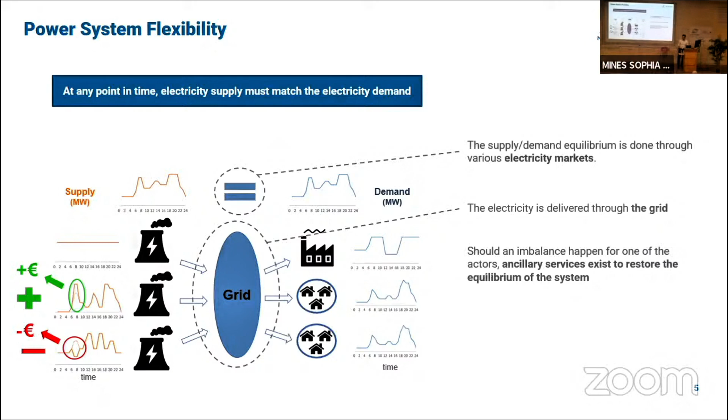But we can ask ourselves: what happens when we increase the share of renewable energy? By doing so, we increase the amount of imbalance occurrences and reduce the amount of conventional generation available for balancing services. To palliate that issue, one possibility is to shift part of the balancing responsibility toward the demand side. Here you have the example of an industrial actor providing reserve and an aggregation of residential actors doing the same.

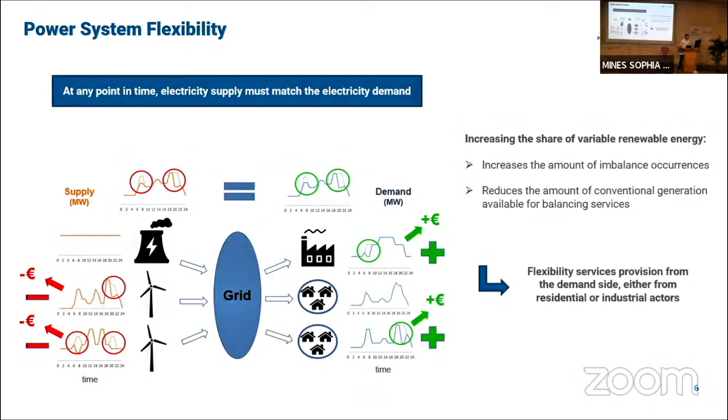In this thesis, we will focus on the industrial part of this. From an industrial actor's point of view, we can define industrial flexibility as the modification of electric usage to reduce its costs, while helping the grid, without negatively impacting its overall process.

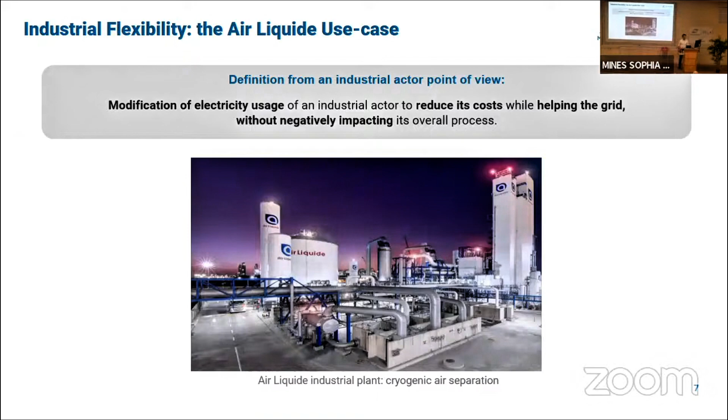Here you have an example of an industrial process at Air Liquide called cryogenic air separation, which produces industrial gases for a various range of clients, for example, oxygen in hospitals. If we replace this by a more schematic view of the process, we can identify Air Liquide's main goals when it comes to industrial flexibility.

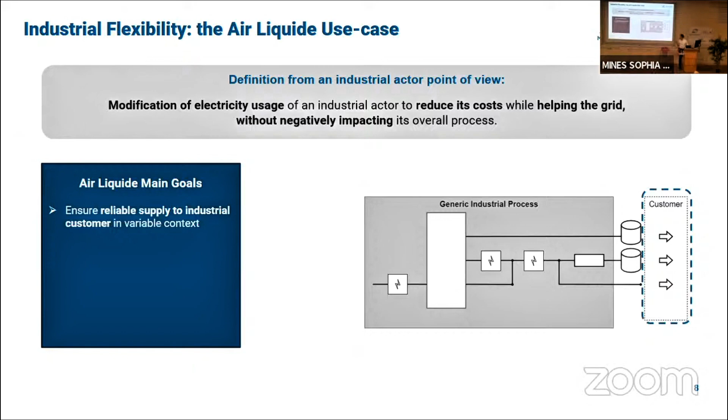First, to ensure reliable supply to industrial consumers in a variable context. Second, to decarbonize the processes through direct renewable power consumption. And finally, to reduce costs through optimal electricity purchase and the provision of ancillary services.

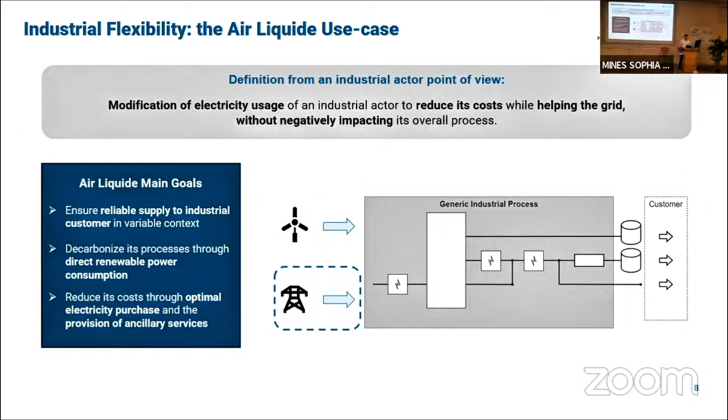We can link these main goals to identified challenges when it comes to the operation of our processes. First, there is difficulty to identify and quantify the flexibility potential of complex industrial processes. There is also uncertainty regarding the ability to power industrial assets with variable renewable sources. And when trying to optimally purchase electricity, there is financial exposure related to electricity markets.

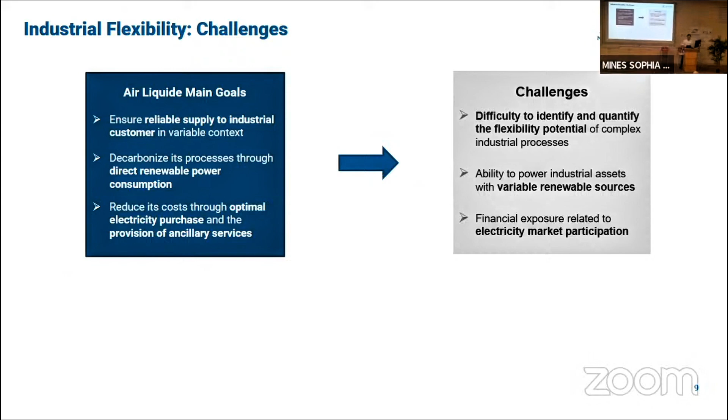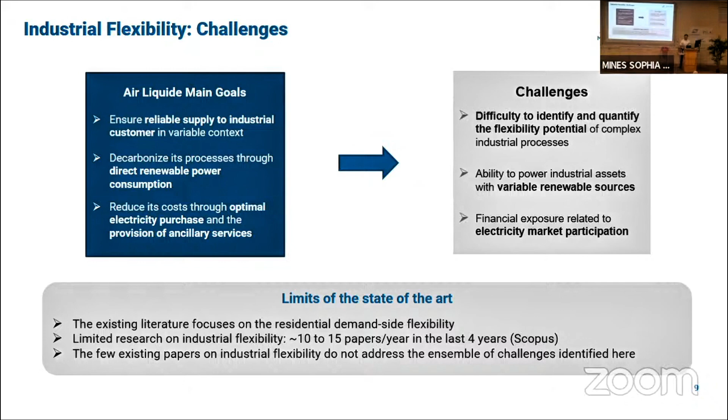When we look at the state of the art, we observe that the existing literature mainly focuses on residential demand-side flexibility, which is smaller and needs to be aggregated. There is limited research on industrial flexibility, approximately 10 to 15 papers a year in the last 4 years, and before that, not so much. The few existing papers on industrial flexibility do not address the ensemble of challenges identified here, especially the difficulty to identify the flexibility potential when considering complex processes, and the realistic modeling of market participation.

To answer these challenges, we have formulated 3 main objectives. The first is regarding the complexity of the process and the flexibility potential identification: we want to develop a methodology to identify and quantify the flexibility potential of an industrial consumer. The second is related to market participation and the uncertainty related to it: we want to formulate a decision-making strategy to valorize the flexibility of a plant in multiple markets. The third is a combination of the two, when we have relatively inflexible assets for which we want to valorize the flexibility. We want to investigate investments in new flexibility levers.

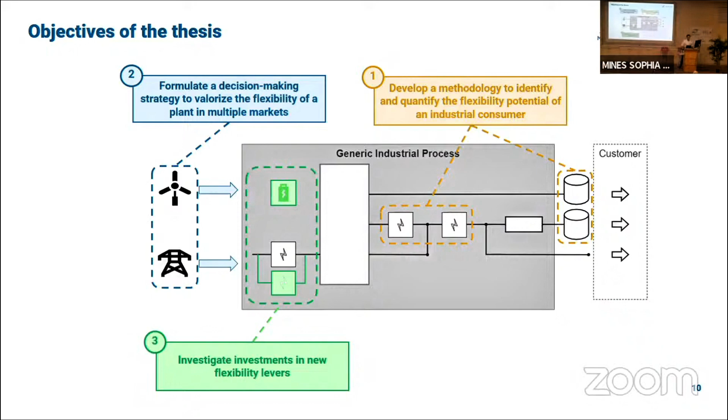Now, on to our first objective, which is flexibility potential quantification. The problem we identify is that in complex processes, knowing the flexibility potential of each individual power component is not enough to characterize the flexibility potential of the whole process.

Looking at the literature, when it comes to industrial flexibility quantification for industrial processes, the identification of the flexibility potential focuses on the limits of the feasible space of operation, but does not consider the possibility to move within this feasible space. Looking at power systems, on the other side, the identification of the flexibility potential this time considers the possibility to willingly move within this feasible space. However, the representation of industrial assets within this analysis is too simple.

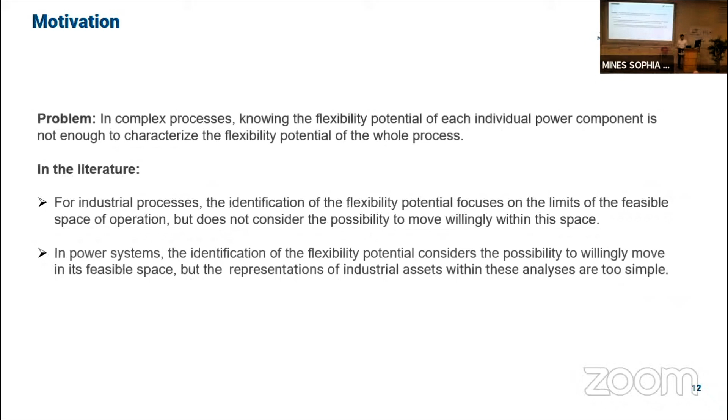So to answer this with a methodology to identify and quantify, we have 3 main methodological steps. The first is that we want to describe the feasible space of operation of a complex industrial process. The second is that we want to quantify the ability to move within this feasible space. And finally, we want to identify the usual operating points of the plant when following a demand profile.

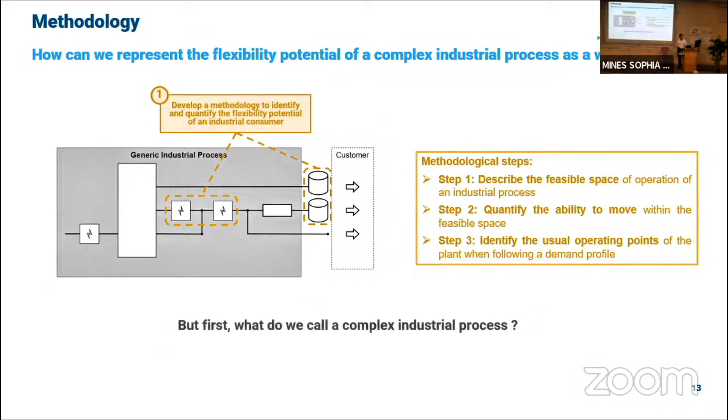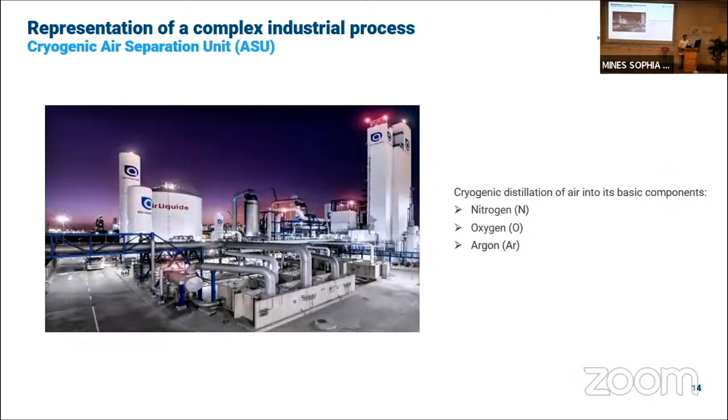But first, we can ask ourselves, what do we call a complex industrial process? Here is the picture from before. We are still looking at the cryogenic air separation unit, which will produce gas that requires a certain chemical equilibrium within the process. This cryogenic distillation of air will turn air into its basic components: nitrogen, oxygen, and sometimes argon. If we look at a more schematic version of this process, we have at the center the distillation process itself, with different pressured columns at different temperatures where the distillation takes place.

Looking at the flexibility aspect of these plants, we have our flexibility levers, which are power consuming components in the shape of compressors before and after the distillation columns, and liquefiers. And we have as well liquid product storage.

For this plant, we have product demand and clients. This product demand can take 2 shapes: it can be gaseous for oxygen and nitrogen, and it can be liquid for oxygen, nitrogen, and sometimes in specific cases, argon.

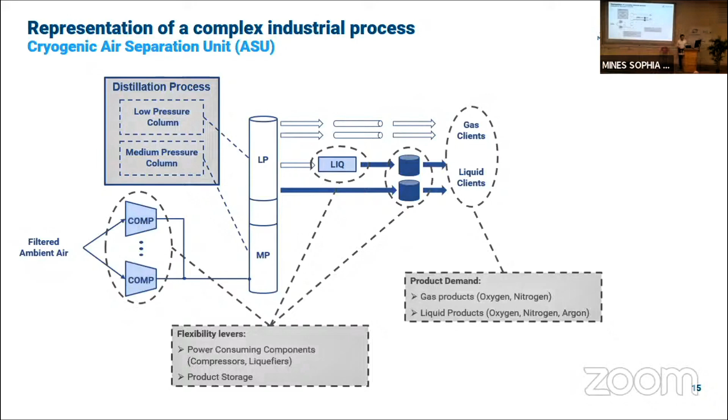The complexity sources for this kind of process are the chemical equilibrium within the distillation process that has to be preserved in the columns, and the product output interdependency. Meaning that we cannot just change the power consumption of our compressors and other power consuming components; we also have to account for the distillation process itself.

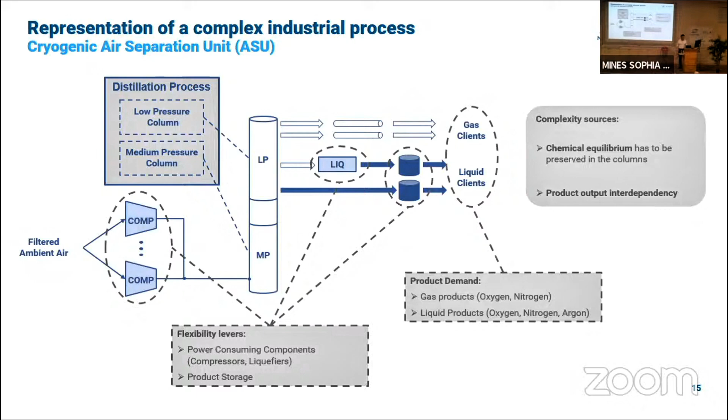Now, if we look at the modeling of such an asset, here we have the representation of a mixed integer linear problem that we use to optimally schedule such a plant. We use an objective function where we minimize electricity costs, subject to a certain set of constraints that will describe the physical behavior of such a plant.

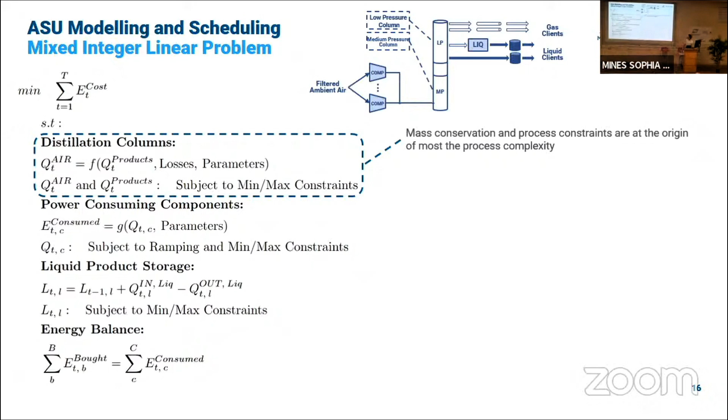So we have here the equations, or a summary of the equations, representing the distillation columns. Within it, we have mass conservation and process constraints, which are the origin of most of the process complexity. Then we have our constraints for power consuming components. Here I put an example of an equation for the compressor: in this case, they have a nominal power, ramping, and the minimum and maximum flow Q within the compressor. We also then have liquid product storage constraints and the energy balance.

Here is the tricky part: the mass conservation constraint will affect the process flexibility, therefore making the flexibility quantification non-trivial.

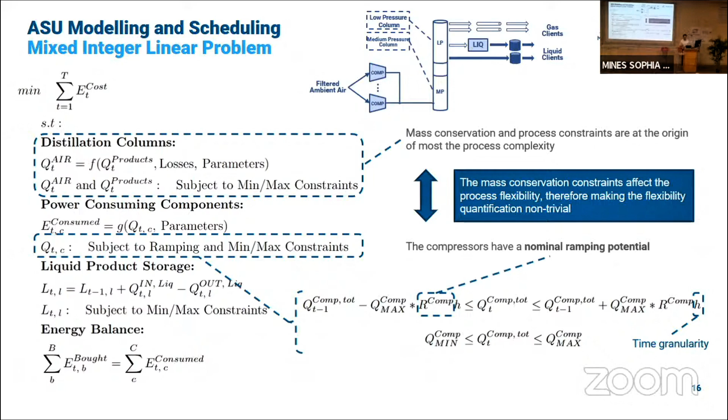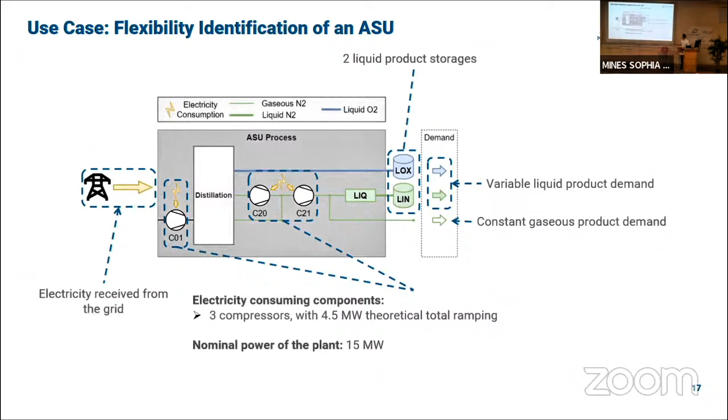Now, looking at our use case, we consider a very specific case: a small air separation unit that will receive electricity from the grid, have two liquid product outputs, liquid oxygen and liquid nitrogen, with variable liquid product demand. And we have one gaseous output with constant gaseous product demand for the gaseous nitrogen. We have our flexibility levers, which are electricity consuming components: three compressors with a total of 4.5 megawatt theoretical total ramping, and a nominal power plant. The nominal power for the plant is 15 megawatt, which is the sum of the compressors.

Now going back to our methodology. Our first step of the methodology was to represent the feasible space of operation.

To do that, we want to create a grid of operating points using the min-max output for both products. We will run a one-time step optimization in which we will fix the output values of the plant and check for feasibility. If it's feasible, we put it in the grid. If it's not feasible, then it doesn't appear in the grid.

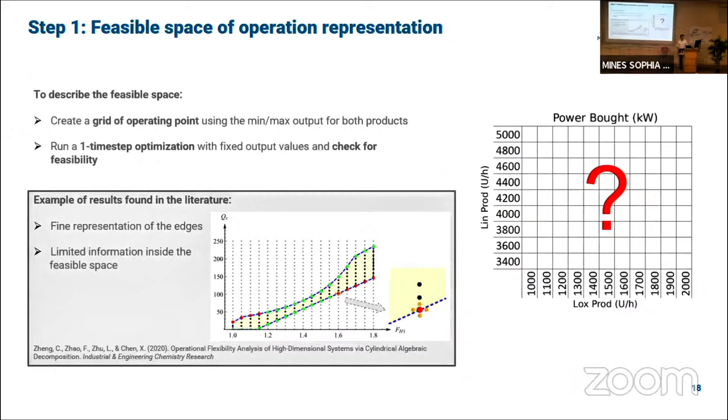Here you have an example of the result found in the literature, where the authors do a fine representation of the edges of the feasible space, but we have limited information regarding what's happening inside the feasible space.

Here is our first result for step one. We represent the feasible space, as we can see here on the right, with the white square being where we cannot go. And the optimal power bought by the plant for every operating point on the grid. We observe that the minimum and maximum outputs of the plant cannot be obtained for both products at the same time.

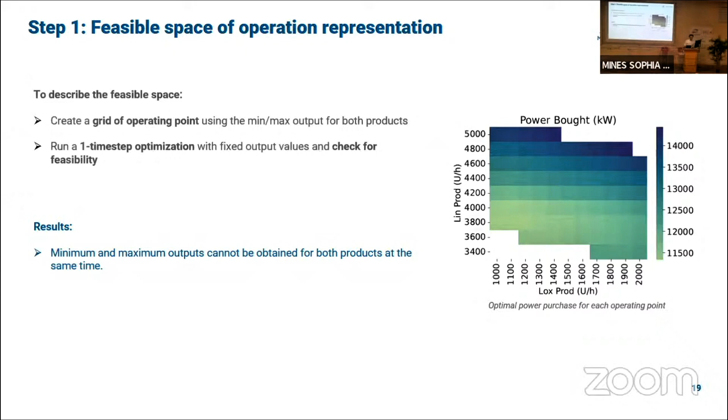From that, we go to step two, which is how do we find the ability to move within the feasible space of operation? To do that, we want to observe power ramping, which is the ability to change power from a given point. So to do that, we run a two-time step optimization this time to move from one given operating point within the feasible space to another within the feasible space, and we check for feasibility.

If it's feasible, we check the power difference between the 2 points. We keep the move with the maximum power difference in each direction, and for each operating point, we have our maximum power ramping. We observe that it varies within the feasible space.

Especially interesting, we have a limited upward ramping here when it comes to the lower value of liquid nitrogen production, which is a representation of the limits due to product output interdependency. Overall, we also identify a unilateral power ramping of up to 2 megawatts and never in both directions at the same time.

So on the left, we have the downward ramp where we consume more electricity. We have higher possibility to go down in power, and the upward ramp, which is the opposite.

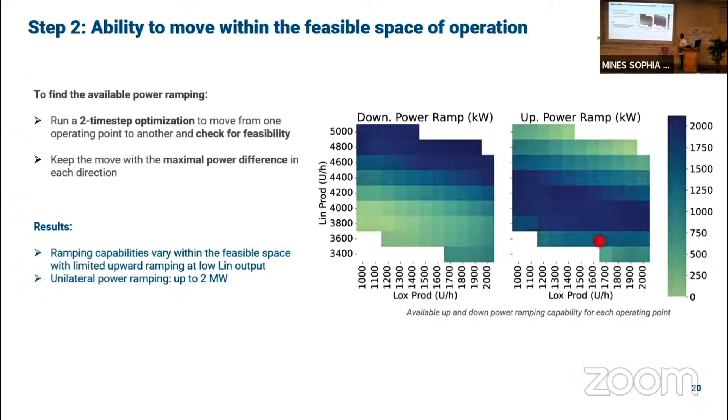From this, we want to identify which operating points appear or are used resulting from the scheduling optimization of the plants when we consider variable demand of the product. To do that, we run a weekly optimization to account for the product demand profile, and we extract the operating points from the results and their frequency of appearance.

We obtain these results. Here on the plot, you see grayed out the unused operating points, and colored, you see the operating points that are used when optimally scheduling the plant with the frequency of appearance. Here in the table, you see the ramp available in terms of frequency occurrence.

What we can see is that the operating points used are located at the extremities of the liquid oxygen output range, and that the liquid nitrogen on the y-axis product output is used to vary the power consumption of the plant. The 2 megawatt of ramp that we previously identified,

only appear between 35 and 41% of the time, and never in a symmetrical fashion. Meaning that we cannot provide for one operating point 2 megawatt up and down at the same time.

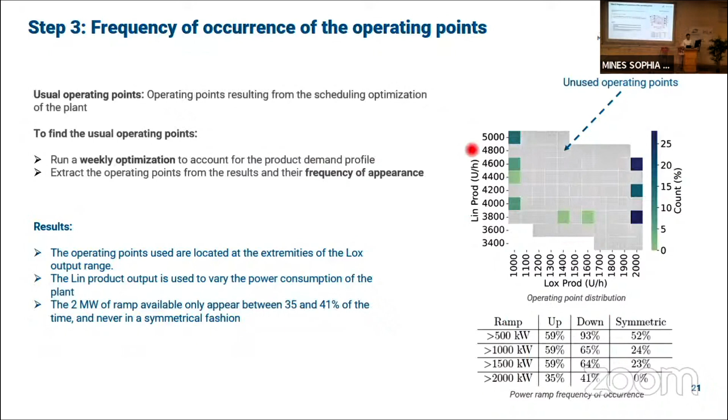Now, to summarize the results for this first approach, we have identified and quantified the theoretical flexibility potential of an industrial plant, mainly starting from a theoretical flexibility potential of 4.5 megawatt from the individual electricity components. The methodology only identifies up to 2 megawatts of flexibility within the process due to the process complexity.

Analyzing the practical flexibility potential available for ancillary services provision when considering demand profiles. Under usual operations, only a handful of possible operating points are used.

The most efficient points are found on the extremes of the feasible space, which limits the available power ramp of the plant. Overall, this methodology provides a graphical information about the flexible potential of the process as a whole, instead of only considering the theoretical characteristic of each individual component.

This work was presented in the PSCC conference in 2021 and then published in the Electric Power Systems Research Journal.

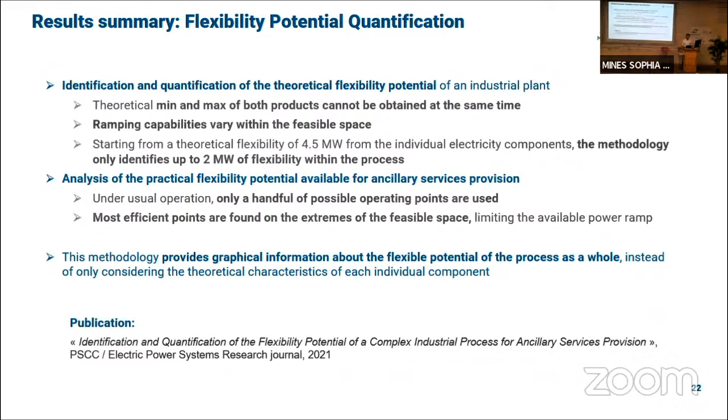Now on to our second objective for this thesis, which is the uncertainty-aware multi-market scheduling. Looking at multi-market participation for industrial assets, we observe that the literature lacks realistic simulations. Participation to market rules are not considered. For instance, gate closure are not considered.

Prices are assumed to be known in advance. The granularity of the bids is not considered. And this all can have a large impact on the financial result of the plant.

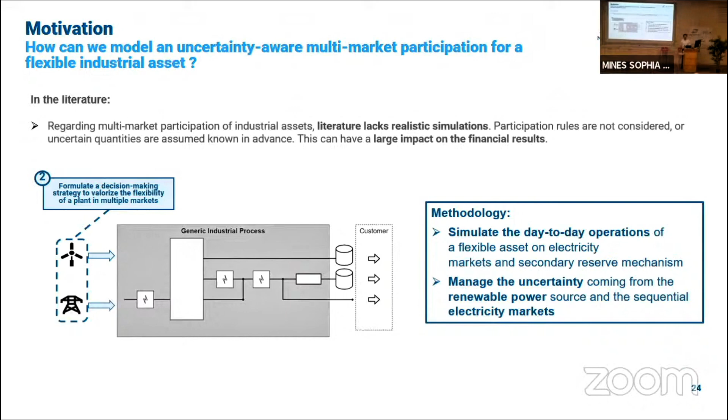To analyze that, we have a methodology with two points. First, we want to simulate the day-to-day operation of a flexible asset on electricity markets and secondary reserve mechanism. And we want to manage the uncertainty coming from the renewable power and the sequential electricity markets.

Looking at the electricity purchase and reserve provision side. Electricity markets span different time scales, which allow us to hedge the uncertainty related to these markets.

When we look at direct renewable power consumption, we cannot buy it on the short-term markets because they do not allow for the identification of the source of the electricity that we receive. To have certainty and certify that the electricity we receive is renewable, we go through a PPA contract, a long-term contract called power purchase agreement, which allows for the direct purchase of renewable power for a certain price that is set while contracting, but we will go back to that a bit later.

Then we have the reserve aspect and the balancing aspect of the markets in green, where the market operator receives bids to balance the grid through several markets. The volumes offered by industrial actors are of high interest to the grid operators because of their large power and energy density compared to residential flexibility, for instance.

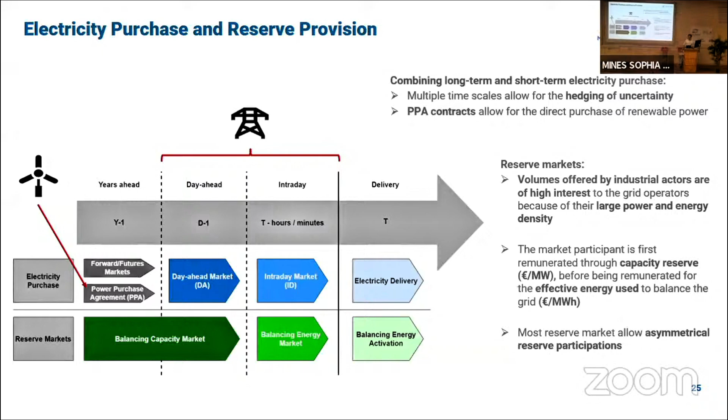The market participant is first remunerated through capacity reserve in a day-ahead fashion, before being remunerated for the effective energy used when considering the effective need of balancing the system, this time with intraday bidding. Most reserve markets allow asymmetrical reserve participation, which is good for us, as we identified previously that we could not provide as much reserve as we wanted in a symmetrical fashion.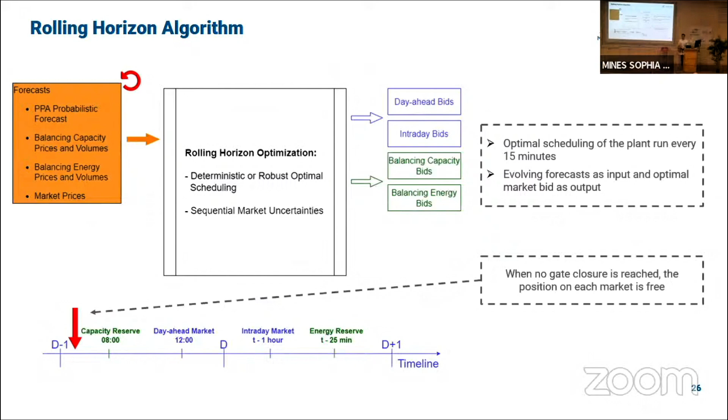Below we have the time scale of the markets. When no gate closure is reached, the position on each market is free and the optimization problem can feel free to optimally dispatch the power bid.

When the rolling horizon reaches gate closure, the last optimal position returned by the optimization problem is used to compute the market clearing. So we decide by the status of the markets if we are scheduled, if we are accepted, at what price, at what volume. And then the market clearing results are used as input, this time on the left, for the optimization. We go through that throughout the day and throughout the year.

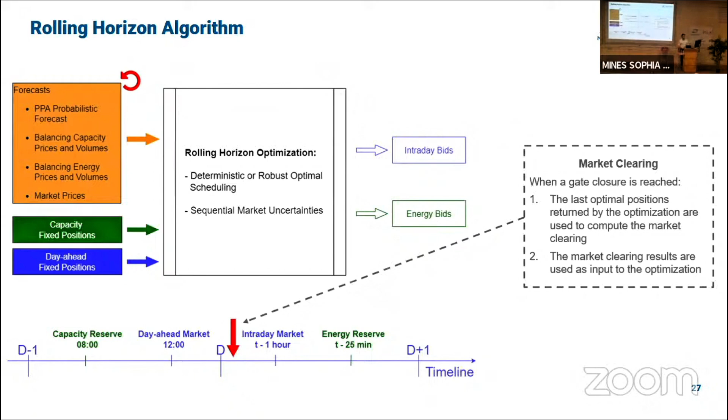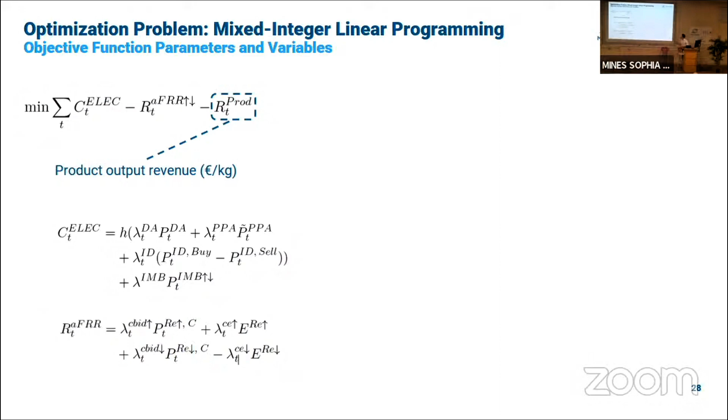Now looking at the optimal scheduling itself, we represent it using an optimization problem, which is a mixed integer linear programming problem once again. Here we present the objective function and the parameters. The main objective is to minimize electricity costs and maximize reserve revenues and product output revenue.

For the electricity costs, we will have the power bought on the different markets considered as a variable, multiplied by the price of the market, which is an uncertain parameter. The energy received through the PPA for renewable power is considered an uncertain parameter because we assume we have to consume anything sent by the wind power plant.

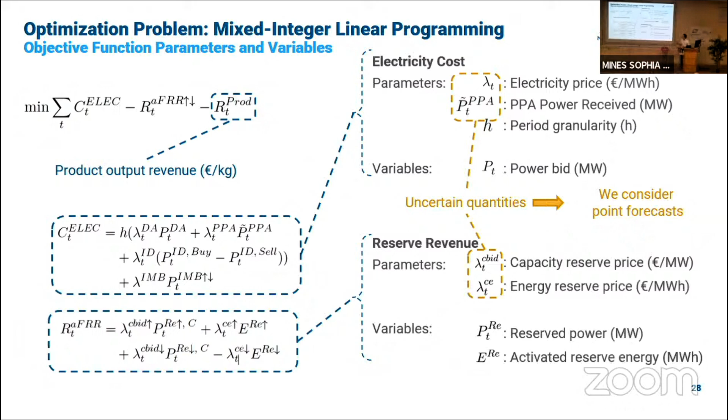When it comes to reserve revenue, the work is a bit similar. We will multiply the power reserved by the capacity reserve bids. So the power reserve is a variable and the capacity reserve bid is also an uncertain quantity, an uncertain parameter. The same is done for the energy activated through the reserve. For our uncertain quantities, we consider point forecasts.

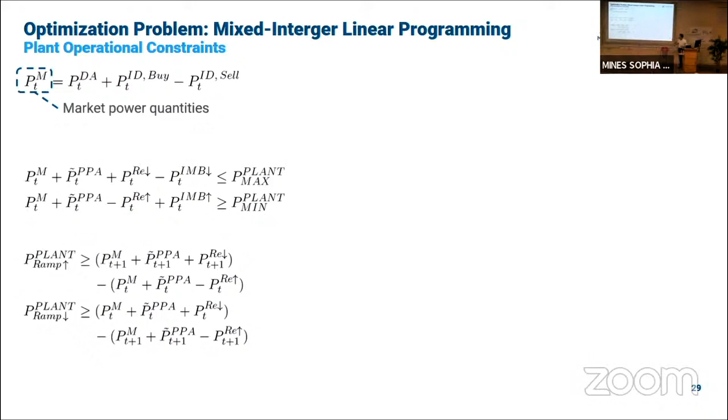Looking at the plant operational constraints, we have here expressed the power market quantities, day ahead and intraday, as PM. We have two types of constraints presented here: first, the minimum and maximum power consumption of the plant, and the minimum and maximum up and down ramp authorized by the plant.

Because we do not know the amount of energy effectively activated for the reserve, as it depends on the current status of the market and grid balance, we cannot use the reserve provision to keep the power balance of the plant. This means that for the min and max power, only the reserve direction that will adversely affect the min-max constraint is considered. For instance, this one will only threaten to violate the constraint, whereas this one would help the system keep in balance.

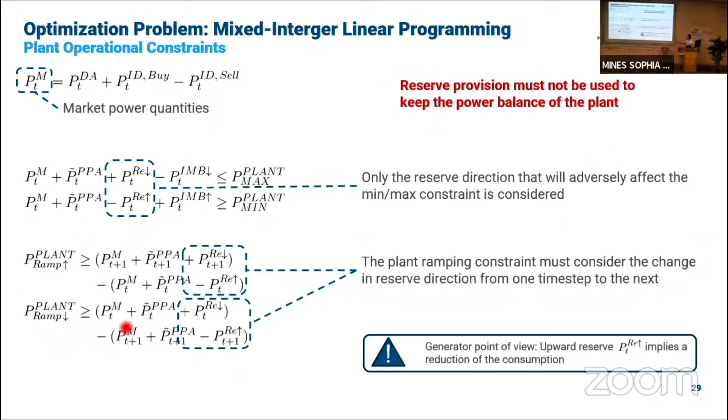The same logic is applied to the power ramping. The plant power ramping constraint must consider the change in reserve direction from one time step to the next, and only in the direction that will adversely affect the constraint. We have to note that we are using a generator point of view, meaning that upward reserve implies a reduction of the consumption of the plant.

Looking at market rules, we only enable one direction per time step for the participation on a given market when we have bidirectional markets, so reserve and intraday market. To do that, we introduce a binary variable, which is used to manage the direction of the participation.

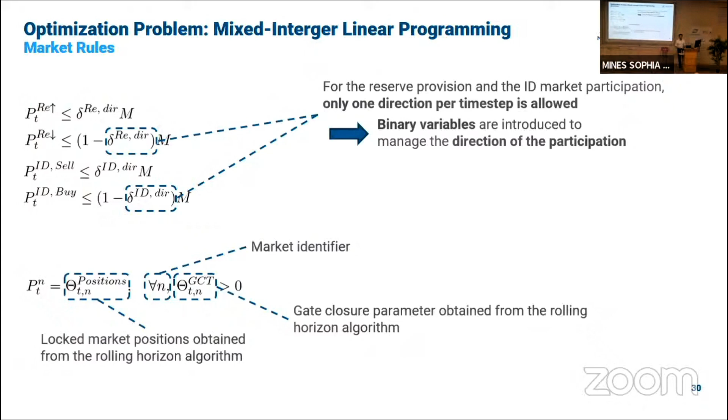To manage the locked participation due to the rolling horizon and the reaching of gate closure, we introduce these constraints, where the power for a given market is set to be equal to a certain position only when this theta GCT is equal to 1. This means that when the rolling horizon sends the identifier saying we reach the gate closure, you cannot change your position on this market anymore.

Now onto the uncertainty management. The first goal that we have as an industrial consumer is to reduce our imbalances. So we want to focus specifically on the wind power, which is uncertain and will cause imbalance. To do that, we decided to go for a robust reformulation of the problem, and here we explain how we did that.

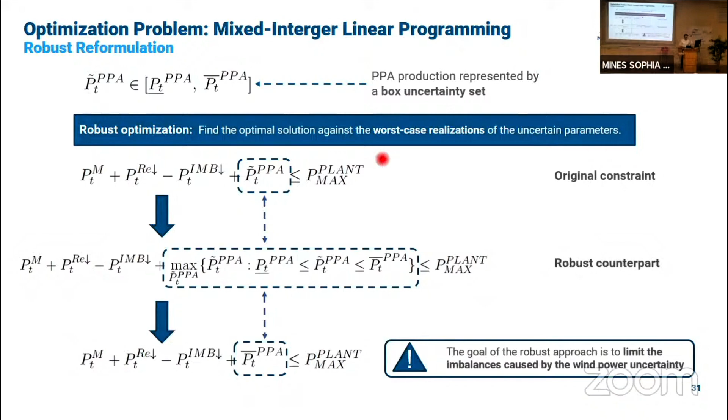Now onto our use case. For this part of the work, we decided to consider electrolysis and green hydrogen production. The goal of this study is to reduce the cost of production of green hydrogen, which is very high due to electricity prices, through reserve provision.

We will receive our wind power through the PPA contract that we mentioned before. This PPA contract, in terms of price, is indexed at 80% of the day-ahead market price and capped to a predefined limit to protect both the producer and the consumer of the electricity, us. We have to consume everything that they send, and we have uncertainty on the production of the wind power, which is why we have a premium on the price, and we buy it at 80% of the day-ahead market price.

Hydrogen produced through power received from the PPA will be considered green. Any hydrogen produced from any other source of electricity coming from the grid will be considered gray. We consider for the reserve market secondary reserve, because this is what is more appropriate for our response time and degradation of the electrolyzer.

The green hydrogen is sold at a premium, here €6 per kilogram, whereas gray hydrogen is sold at €2 per kilogram, which is roughly the price we sell hydrogen at when we use fossil fuel-based technology. So the ultimate goal would be to reach €2 per kilogram for the green hydrogen. The hydrogen produced by the plant is sent to a hydrogen network, therefore no specific demand is to be satisfied.

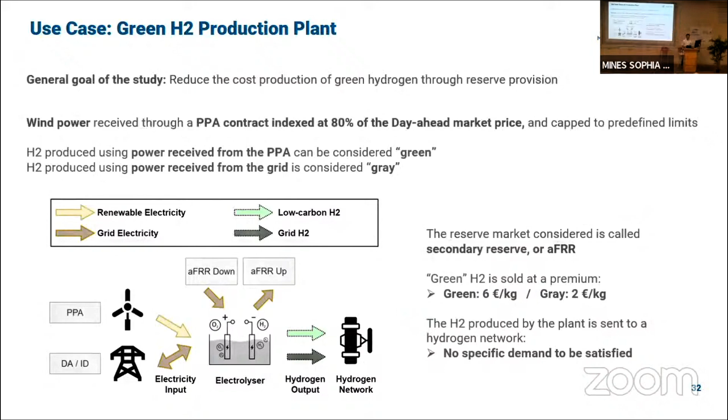Looking at the market participation, we want to simulate the run over the year 2021, which is interesting because in the second half of 2021 there was an energy crisis due to a flare of natural gas prices. This simulation will therefore illustrate the behavior of our algorithm in extreme price situations. We also consider German market rules and prices because of the availability of reserve prices and quantities to the public, and because they have similar rules to the ongoing European reserve market harmonization.

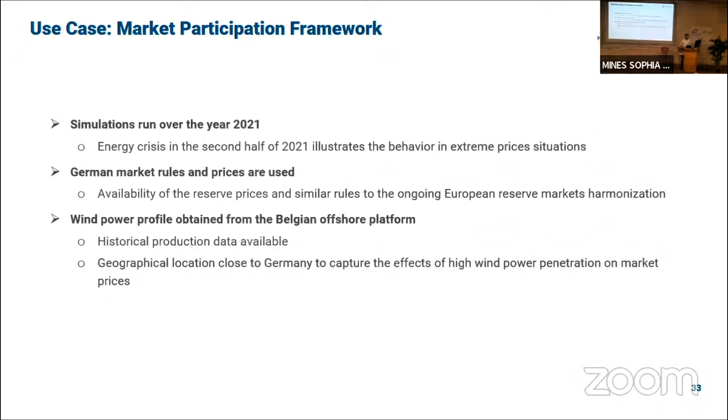On the side of wind power profile, we obtained it from the Belgian offshore platform, once again because historical production data was available, and because its geographical location is close to Germany, and therefore we can capture the effect of high wind power penetration on the market prices.

Now, onto the results. Here we will present an illustrative run done during year 2021, where we have the power market transaction for the electrolyzer: the day ahead market in blue, intraday market in pink, and the PPA direct consumption in green. We observe that electricity is bought on the day ahead market to produce gray hydrogen when power prices are sufficiently low to reach the €2 per kilogram price, and the plant consumes all the power received from the PPA contract.

Looking at the reserve, we observe that the plant provides reserve around its power profile. Here we can see it, and if we look only at the reserve, we have it at the bottom left. We observe that to be realistic compared to the literature, the effective energy activation of the capacity reserve bid is dependent on the real-time imbalance of the system, meaning that for every time step, the effective energy activation of the reserve will vary.

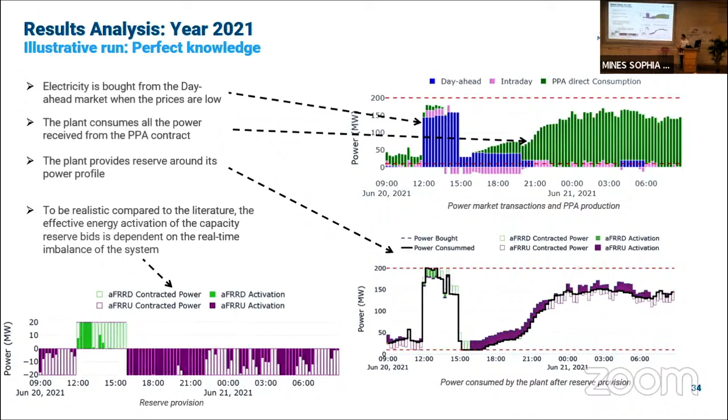It's something that we cannot predict. Now, looking at a higher level view of results for the year, we average the cash flow increase between no reserve and with reserve on top, over the year. We do something similar at the bottom with imbalances, without reserve on the left, with reserve on the right, with percentage of occurrences, and the 95% CVAR on the volumes of imbalance.

What we observe when we look at the cash flow is that reserve provision generally increases the cash flow. We have the average over the whole year on the right. The reserve addition is particularly advantageous in times of crisis, which was the second half of the year, where we observe up to 300% increase in cash flow during the crisis due to very high electricity prices.

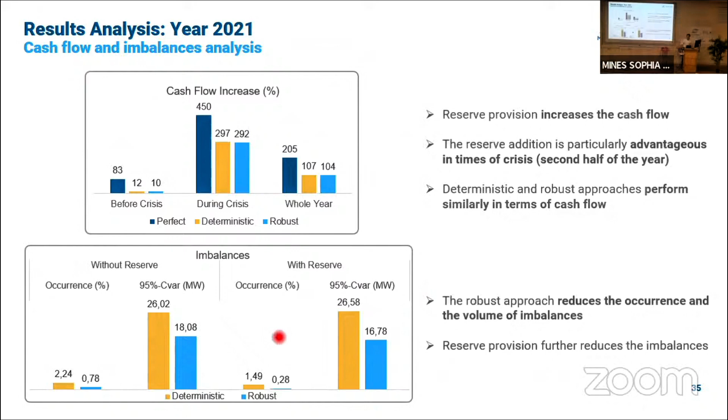When we look at the imbalances, we observe that the robust approach reduced the occurrence of imbalance quite drastically, here without reserve and here with reserve. We also observe that the reserve provision further reduces the imbalance.

Now to summarize the result of this part: the behavior of an electrolyzer providing reserve services was simulated. We observed that adding secondary reserve increases the average cash flow, and that this can bring down the selling price closer to gray hydrogen. So if you remember, it was around 4 and 5 euro per kilogram.

So it's not yet around the 2 euro per kilogram, which is our goal. The impact of uncertainty was assessed. We observed that the deterministic and robust approach have similar cash flow performance; however, the robust approach shows great imbalance improvement. We also observe large differences between the perfect knowledge and the uncertain approach, hinting at the fact that we could increase the performance of our algorithm by increasing the quality of the forecast, especially when it comes to reserve market prices.

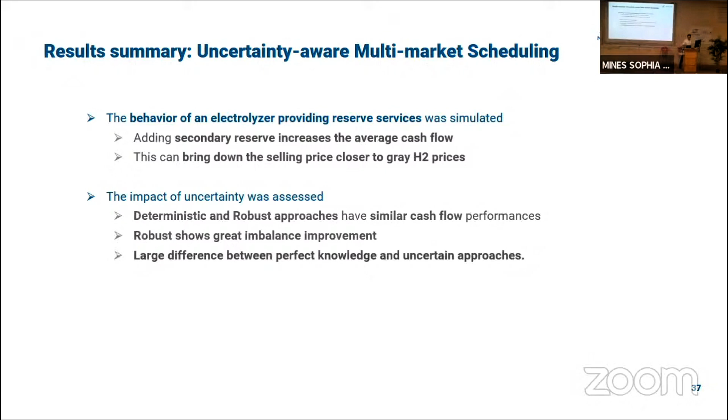Now on to the last part of our presentation, the third goal, which is the investment in additional flexibility lever. The problem we have is that the inflexible aspect of air separation units prohibits them from operating with large amounts of renewable energy. In the literature, we have observed that the provision of ancillary services for this type of plant is only considered through the addition of an external flexibility lever.

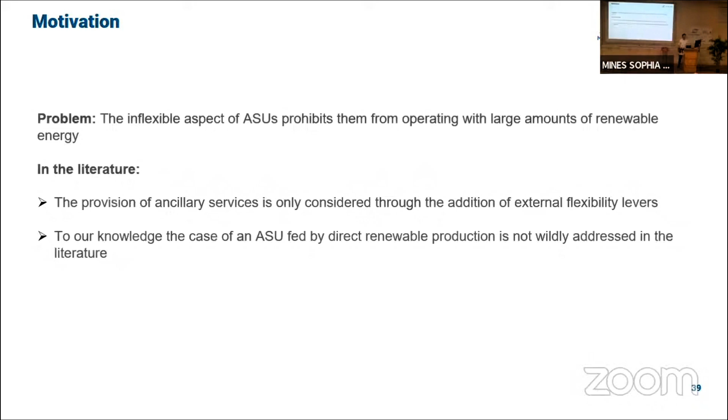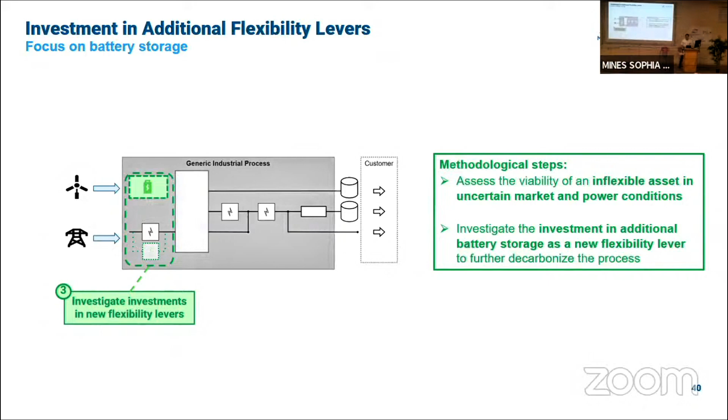To our knowledge, the case of an air separation unit fed directly by renewable power production is not widely addressed in the literature, which is why we will use it as a use case for our investment in flexibility lever approach. Our methodology will be to first assess the viability of an inflexible asset, in this case an air separation unit, under uncertain market and power conditions, and then we will investigate the investment in additional battery storage as a new flexibility lever to further decarbonize the process.

Here is our use case. The general goal of the study is to assess the ability of an air separation unit to operate under uncertain conditions. So we take our previous air separation unit and we input it in our market participation framework.

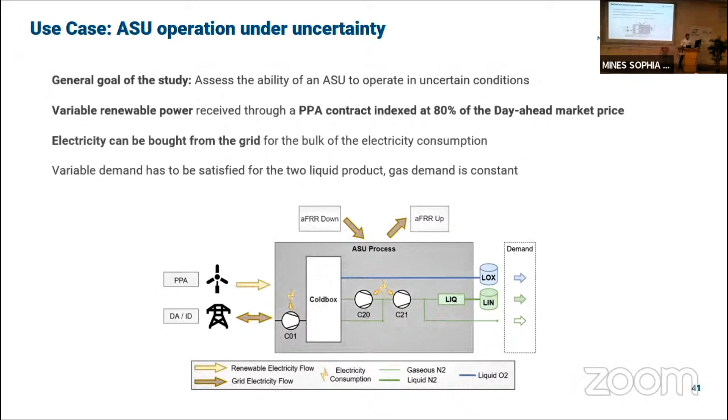We still have the same context around the market participation, with variable renewable power received from a PPA contract indexed at 80% of the day-ahead market price. We can buy electricity from the grid for the bulk of the electricity consumption, and we have to satisfy the variable demand of the plant, the two liquid product, and the gas demand that is constant.

Here we have a reminder of our two methodology. First, we want to do the reserve provision analysis for the plant, so we have different market setups where we will observe the effect of uncertainty on such an inflexible plant. Then we want to add a battery to increase the amount of renewable power that we can receive. Because we only consider the amount of renewable power that we can receive, we do not provide reserve anymore for this step 2. We only focus on the wind power itself.

The rolling horizon is run over 3 different weeks of year 2021, because adding the air separation unit within the optimization framework makes it harder to compute, and therefore we had to average over 3 weeks and extrapolate what would happen over a year.

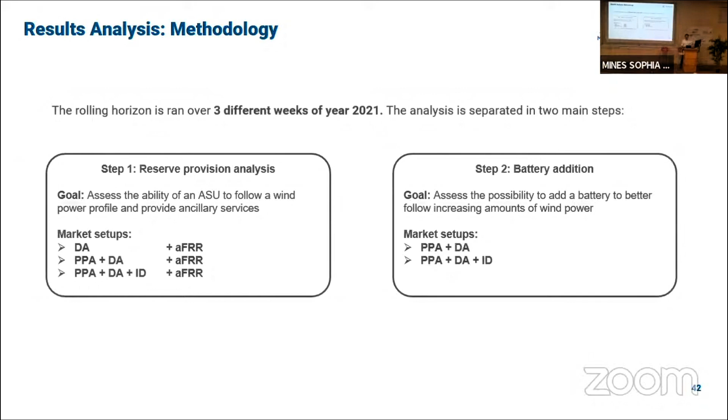Now onto the result analysis for this simulation. Here we have the average electricity cost for the plant for various amounts of reserve provided on the x-axis, and below the imbalance occurrences and the imbalance average volume with the 95% CVaR, again for various amounts of reserve produced. The various colors are our various strategies depending on the market participation and the uncertainty.

We observe that without any wind power, the reserve provision presents an economical interest up to 2 megawatts. When we start providing 3 megawatts, the optimization problem cannot effectively manage the fact that our plant cannot go up more than 2 megawatts, and therefore we have an increase in cost and an increase in imbalance.

Which is also the second point: imbalance never occurs, or very rarely, up to 2 megawatts of reserve, but more frequently at 3 megawatts. This is in line with what we found in the first part of the work, where we identified up to 2 megawatts of reserve for a plant, and not 3.

When we add wind power and intraday markets, we observe that this overall reduces electricity costs because we have electricity that is less expensive, and we can additionally reduce the cost on the intraday market. However, intraday market addition increases the amount of imbalance, which we can see when we compare with and without intraday on the plot.

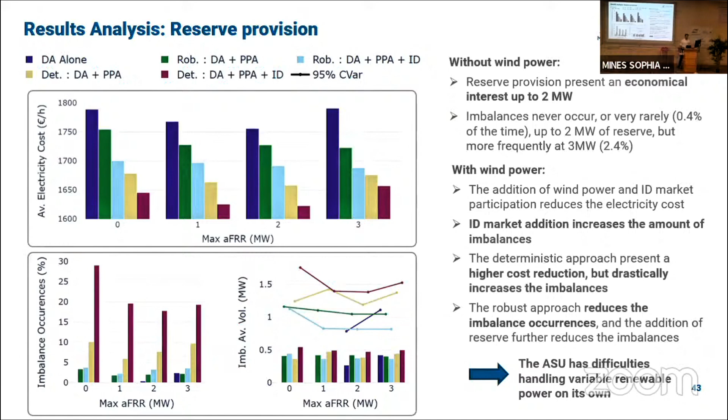To help with that, we will consider the addition of a battery. Here you have the optimization constraint for the battery.

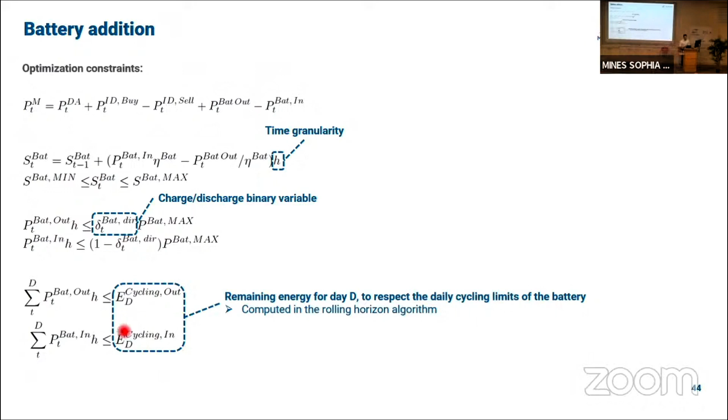So we have the market constraints, the storage constraints for the battery, and the direction where we only allow charge or discharge every time step with a binary variable. We have also introduced a cycling constraint on the energy usable by the battery over the day. Because the optimization does not see what happened before in the day, we have to handle it in the rolling horizon algorithm, which is why we input here this quantity of energy, the remaining energy for the day, to the battery, considering what we used before, obtained from the rolling horizon.

We observe that doing so without any restriction on the usage of the battery will operate on the markets to catch the spread of prices between the markets, generate a profit, but do not have electricity enough to actually balance the plants, which was why we added it in the first place.

This is why we introduced this restricted battery management strategy, where the optimization problem cannot plan battery usage more than 6 hours ahead, which is the same as the intraday market participation. Therefore, it can only be used as a balancing tool without any day-ahead market bids.

One specific point: the results are presented through a sensitivity analysis, and we consider only a 2-hour battery system, meaning our batteries are dimensioned so that they can charge fully or discharge fully in 2 hours, which is why all the quantities for the batteries will be expressed in megawatt hour without specifying the power output, the maximum power output of the battery.

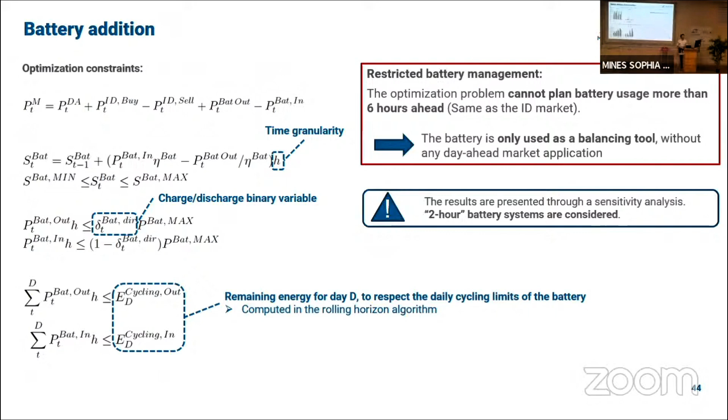Looking at the results, here we have the average cost reduction when we oppose it to a no-battery case, for various nominal sizes. Below we have the imbalance occurrences with the same setup, and the colors represent different battery sizes. We observe that adding a battery always reduces the costs. Note that we do not consider the investment aspect at this stage.

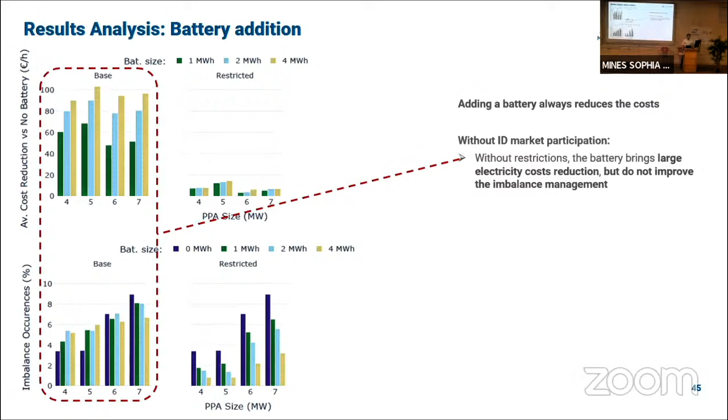Without intraday market participation and without any restriction, the participation of the battery brings large electricity cost reduction, but does not improve the imbalance management. In some cases, it even worsens it. Adding restriction, we effectively reduce the imbalances, but we drastically reduce the cost reduction.

To palliate that, we decided to add the intraday. If you remember before, the intraday was worsening the situation in terms of imbalance. We decided to combine it with the battery addition, with the hope that the battery would reduce the imbalance and the intraday would increase the cost reduction, which is what happened. We can see here that for the average cost reduction, it is higher when we add the intraday, and we keep our imbalance reduction.

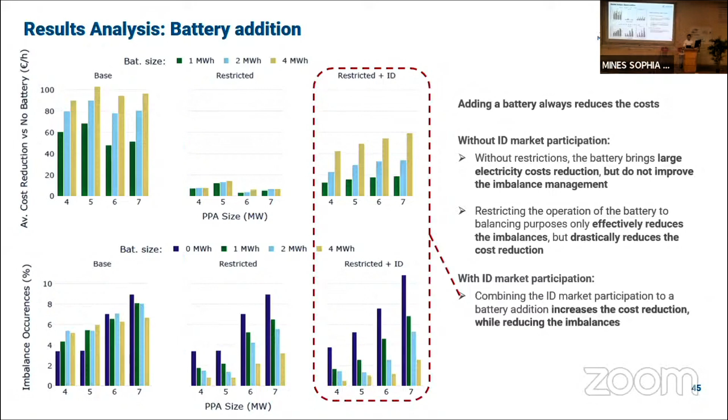Now on to the investment aspect. The objective is to make the project of investing in a battery viable. To do that, we have to know two things: the capex of the battery, which is the investment price, the cost of the battery itself, and the expected cash flow of the battery - how much money we will generate with it to refund the battery.

The thing is that in the literature, the capex for such kind of battery varies quite a lot depending on the source that we look at, which is why we decided to not include it in our computations. We observed, however, that it rarely goes below 400 euro per kilowatt hour.

What we did is consider a metric called discounted cash flow, where we take all the expected revenues over the lifetime of the battery, and we account for the future value of money, meaning that future cash flow will have a lesser value in 5 years than now. How we can interpret this discounted cash flow - note that we also normalize it by the battery size, which is why it is expressed in euro per kilowatt hour of battery. This discounted cash flow can be interpreted as the maximum capex that we can afford to invest in a battery if we want to have a viable project.

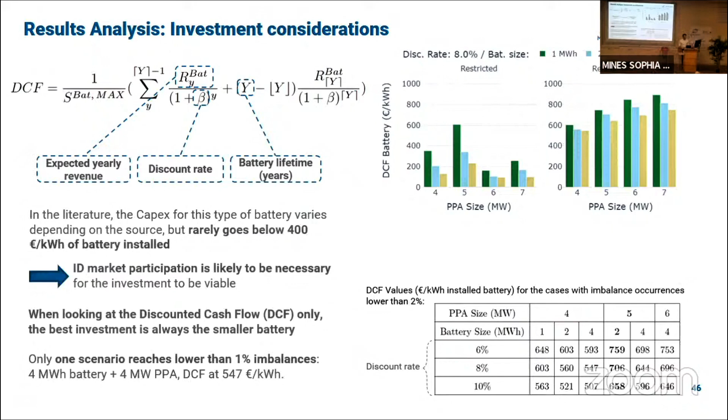We have varied the discount rate when it comes to investment. It depends on the amount of debt that you put into your investment, so it gives a broader view. We observe that we only have 6 scenarios that have imbalance occurrence lower than 2%, the best one being 5 megawatt PPA with a 2 megawatt hour battery. That brings us, if we keep the 8% that we had on the plot, to 700 euro per kilowatt hour for the discounted cash flow. We also observe that only one scenario reaches lower than 1% imbalances, which is the lower amount of wind power with the higher sized battery, at the DCF of 547 euro per kilowatt hour.

Now, to conclude on this part, the viability of an air separation unit in a certain market and power condition was assessed. We observed that the air separation unit has limitations in terms of reserve provision, which are consistent with the results obtained in the flexibility quantification approach. The air separation unit cannot handle variable wind power on its own.

When we look at potential investment in additional battery storage, the battery needs restrictions on decision lead time to effectively be used as a balancing tool. The intraday market participation is made viable by the addition of the battery. And we have 6 scenarios that show less than 2% imbalance occurrences, but only 1 that shows less than 1%.

Now to conclude on the results obtained in this thesis, the contributions and the perspectives.

Regarding the flexibility identification and quantification methodology, we propose a methodology to simply and graphically represent the flexibility potential of a complex industrial process, accounting for this process as a whole.

The effect of process complexity within an air separation unit on process flexibility were observed. These results were presented at the PSCC 2022 conference. We submitted it in 2021 for the 2022 conference.

And published it in the journal Electric Power Systems Research. Regarding power flexibility valorization through multi-market participation, we developed a rolling horizon algorithm to simulate the realistic operation under uncertainty of industrial assets, providing reserve with renewable power sourcing.

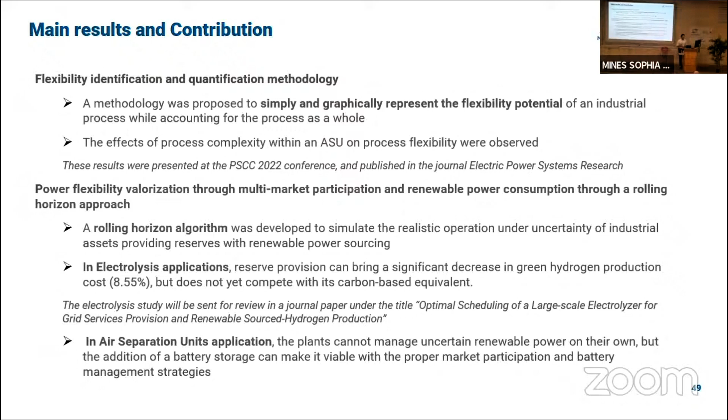Now, looking at the perspectives for this work. Once again, going back to flexibility quantification, we could extend the flexibility quantification methodology to consider plant design with flexible operation in mind, taking a greenfield approach.

When we design the plant, we want to plan how we could use it flexibly and therefore have more freedom when we design this plant. We could also explore the impact of more complex modeling on the flexibility studies performed in this thesis.

Regarding flexibility valorization, we could decide to go toward industrial clustering, which could increase the amount of flexibility available to industrial actors. Combining different plants with various amounts of flexibility could, on the global scale, increase the flexibility potential.

We could also look at storage management outside of the limited optimization time frame, which needs to be investigated. On this point, we optimized storage over an optimization time frame of a few days. When storage is designed to operate for demand with weekly profiles, the optimization cannot see beyond the previous or future time step, so we have to find a way to optimize storage management outside of this optimization time frame.

It clashes, however, with the concept of rolling horizon, which requires optimization with a limited time frame. A similar problem happens with flexibility lever investments, where we want to optimize the investment in additional flexibility levers instead of using a sensitivity analysis. However, to do that, we need longer simulation and optimization timescales, which are not compatible with the rolling horizon approach that we used.